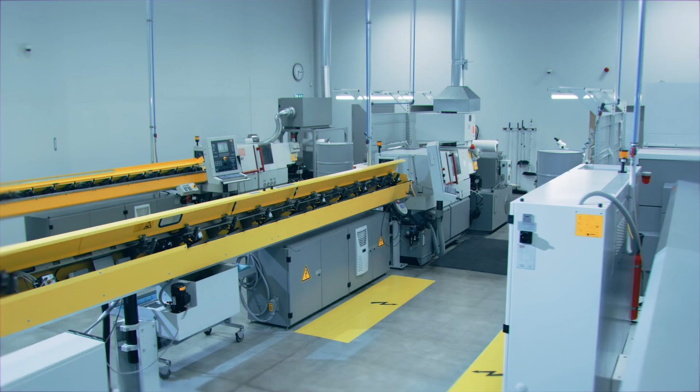Production facilities in all sectors are changing rapidly, and they have to do so in order to keep up with their competitors. Digitization plays an essential role in this process, but it also increases the complexity of systems. What if a problem occurs and no one's there, especially with the current coronavirus pandemic forcing us to change things faster in this area? Digitalization in service and maintenance is the solution.

And that's no problem at all for the Pepperl+Fuchs family.

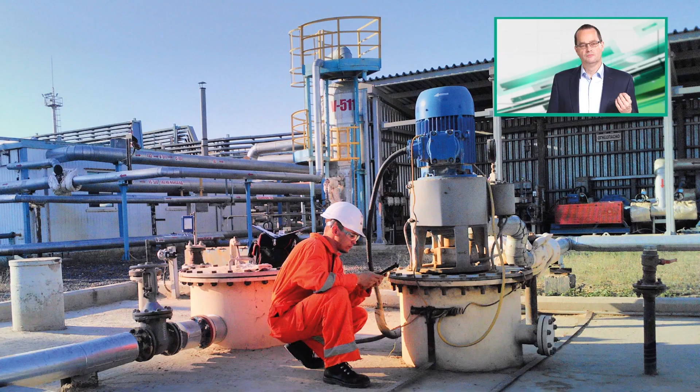The hardware and software world are getting more and more complex, and Pepperl+Fuchs and ecom are dedicated to bringing these two worlds together and providing solutions to support you with your digital transformation process. You need mobile devices, you need intelligent wearables for remote collaboration. You need proper mobile applications which provide the right information at the right time to your local maintenance personnel, the same for services. You need location-based services, you need to enable remote assistance for expert video calls, and you need the right instructions and guidelines on site at the right time, at the right location.

And with this vision, I'm happy to introduce you now to Johan De Geyter. Johan is the CEO of Iristick. Iristick is a leading supplier of smart glasses with a high level of experience, not only in the technology but also in the applications. Johan is now going to introduce us to the world of augmented reality in tomorrow's workplace, in particular in the field of service and maintenance.

Thank you, Jörg, for the introduction, and thank you for the great overview of digital initiatives ecom currently already masters. My name is Johan De Geyter, and I am the CEO of Iristick, and we are the manufacturer of these Iristick smart glasses. We believe that smart glass technology will become a key technology for connected workers in the future. Frontline workers will use smart glasses to provide information to remote experts, or will have access to digital information to execute their daily tasks. Since more than a year, we have the pleasure of working together with ecom. Their Smart-Ex smartphone is a very powerful device that connects to our smart glasses.

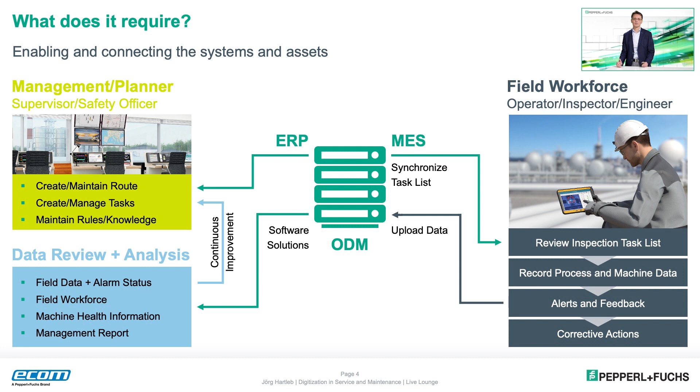And of course, it's about the devices. I touched this already a little bit, and for us at Ecom, mobile devices means our tablet computers, our smartphones, our smartwatches, and of course also auto ID systems, which help you identify the assets in the field.

But we just don't leave you alone with the devices. We help you roll out your software onto these devices, manage those devices, and take care of the security patches on the devices. We know that security and IT security is one of your major concerns.

What else does it require? We were already talking about the mobile device. But the mobile device is just a dumb piece of electronics without software. The software has to be tailored for these jobs. We have to make sure the information presented to the mobile worker is structured, lean, and that we provide him just the information he needs right in the moment when he has to perform the job.

On top of this, the systems he has to deal with become more and more complex. If I look at myself and compare myself with my team, I have the least knowledge of everybody, but I know whom to ask. This is about remote assistance. We will talk about this a little bit later.

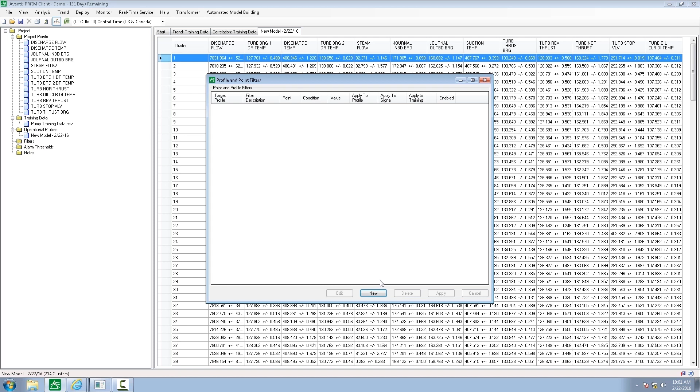Just have a look at such a system. We are combining lots of data from the ERP systems, from the manufacturing execution systems, and from quality systems. We combine all this data and look at specific assets, looking at how these assets behaved in the past.

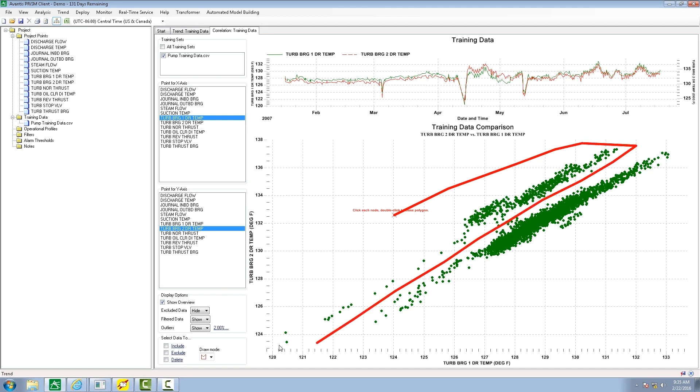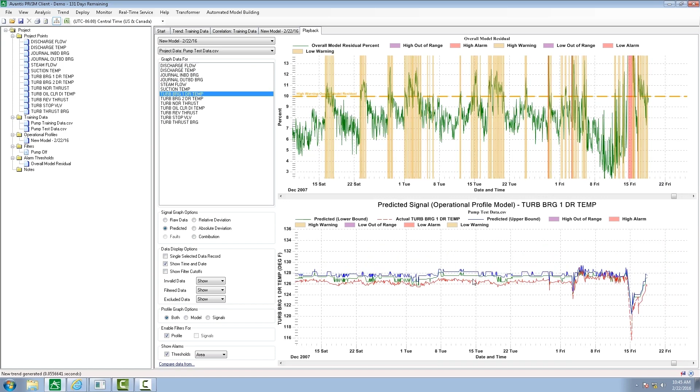We are looking at patterns, at failure patterns. What was the runtime? What was the load of the machine? What does this tell us in terms of when this asset is going to fail? This is what it is about.

But just looking in the past is not everything. We should combine this with real-time data from the asset itself, with sensors and everything, and of course with data the maintenance teams are gathering while they are doing their job.

And the outcome, best case for the user, is not just a pattern or a huge Excel file. The outcome, best case, is a checklist telling him this and this asset has to be maintained because we are probably not too far away from a possible breakdown. He gets the checklist, he gets the procedures - what has to be done, in what sequence the maintenance has to be done. He will have access to the operating manuals, access to the machine data, to the drawings.

And of course, on the fly, all the checklists are being generated and the job is documented. And again, if we think back to what we were just discussing, this data helps to make the predictions more precise.

So what is then the solution? I'm talking about the perspective of the mobile worker. We were just talking about the back-end systems, but that's not what our teams out there are dealing with. They have to be presented with meaningful information, stripped down to what is needed.

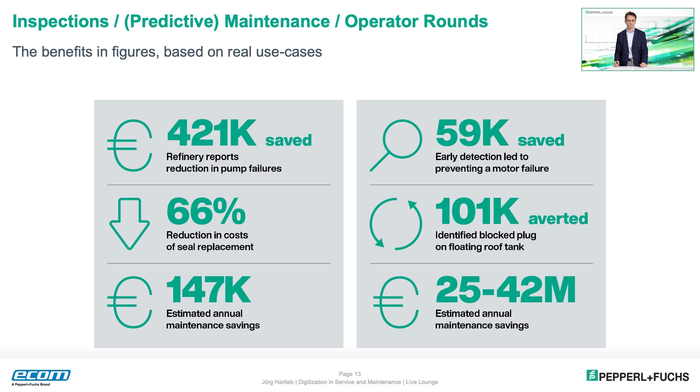When we are talking about predictive maintenance, we also have to talk about remote assistance, because using data for planning the maintenance is just one thing. On the other hand, we have to help the teams out there with their job. The systems become more and more complex. Not everybody is able to know everything. Same with me, if I look at my team

it consists of highly specialized people, and I don't claim for myself that I know everything. I know probably the least, but I know whom to ask. And this is exactly what these systems do. You can call in an expert. You don't have to wait for him. You just give him a ring, open a video stream, and have him look at what you see. He can help you assist with your job. And as we go along, we will see that we want to take this even one step further. But let's see.

Closing the skills gap. I don't think that the teams out there really have a skill gap. But imagine something broke down. You have a certain idea of what has happened.

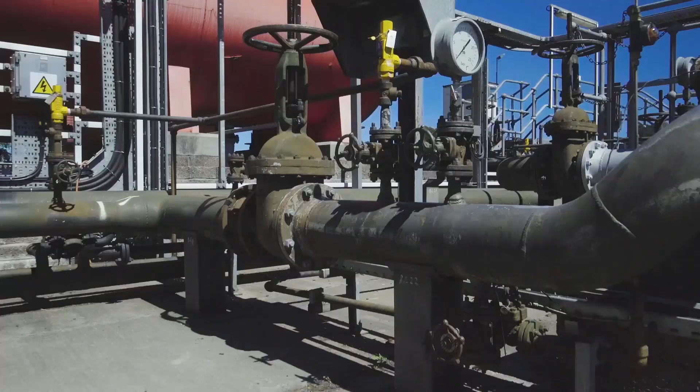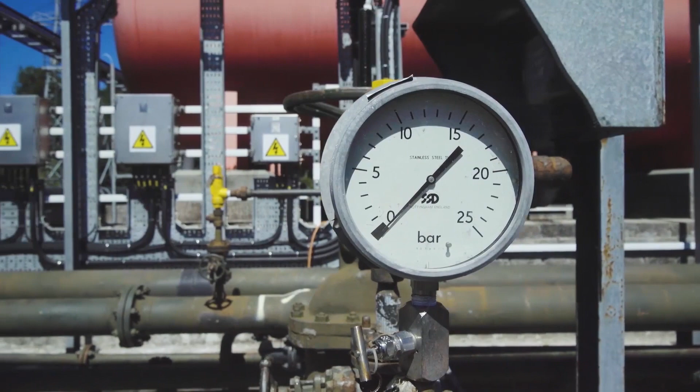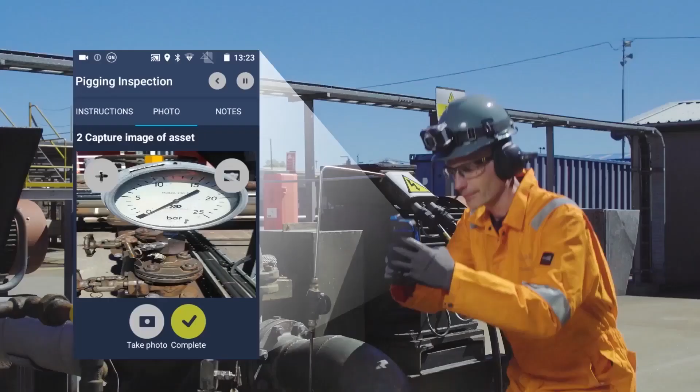Digital transformation is changing the industrial landscape. Enterprises require connected solutions for rapid response, cost reduction, improved preventative maintenance, and increased uptime. In this scenario, a rig worker, Kyle, is about to complete his first inspection on a recently installed pipe fitting and gauge. With his zone-rated device, Kyle initiates his work instructions by scanning the asset barcode. Once Kyle completes the first part of the inspection, he is then instructed to connect the Onsight Cube to his phone and calls Taylor, the off-site senior engineer, to continue the pipe gauge inspection.

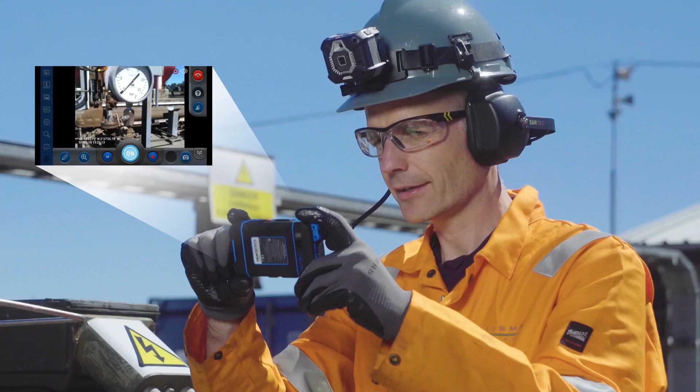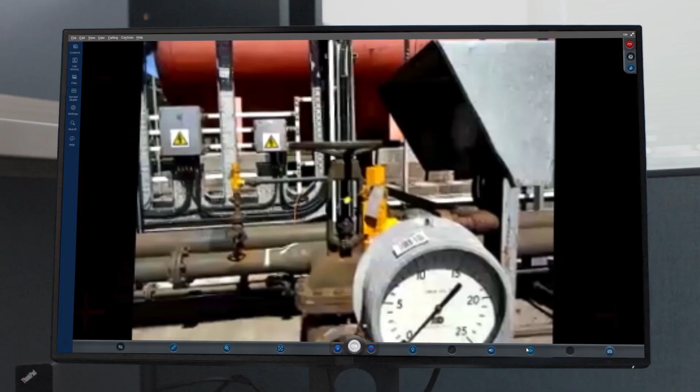Hi Taylor, it's Kyle from the Aberdeen rig. I'm just checking this new pipe gauge, and I'm wondering if the reading I'm seeing is correct. Hi Kyle, the numbers are reading correctly. I am switching to thermal view to confirm the gauge with the temperature reading. I'm also recording this session to add to our knowledge base. Taylor changes the view from the cube to thermal and adds the temperature spot and captures images. I'm going to bring in our supplier to confirm what I'm seeing.

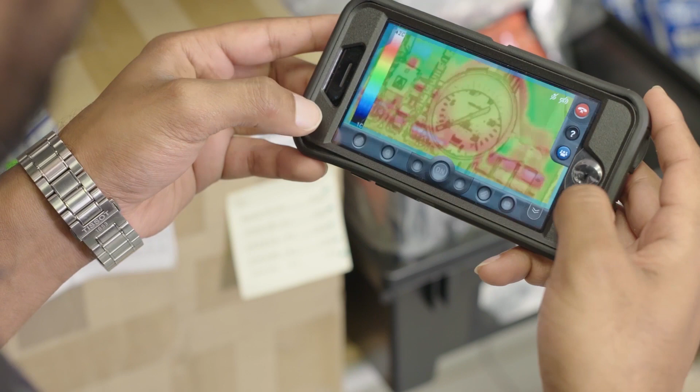Hi Taylor, how can I help you today? Hi Zach, this is our first time looking at our gauge since installation. Here is the thermal view, and here is the gauge. Is what we're seeing what you expect? Yes, this looks right. I'm going to mark off the initial check as complete. Thank you, Taylor. Thanks, Zach.

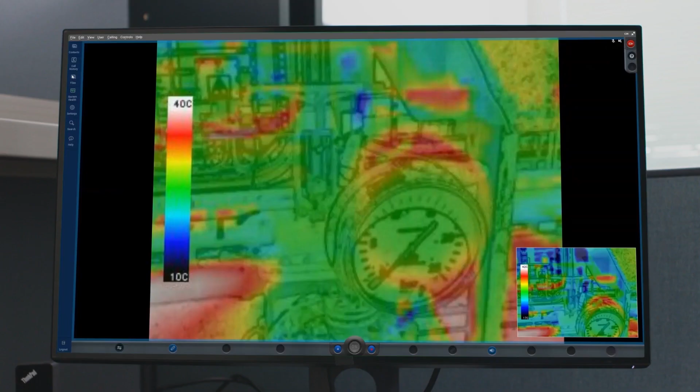Taylor and Kyle are able to complete the inspection. Once the call ends, the recording and pictures are automatically uploaded to Onsight Workspace for future reference. Okay, thanks Taylor. We'll speak to you later. Thanks, bye.

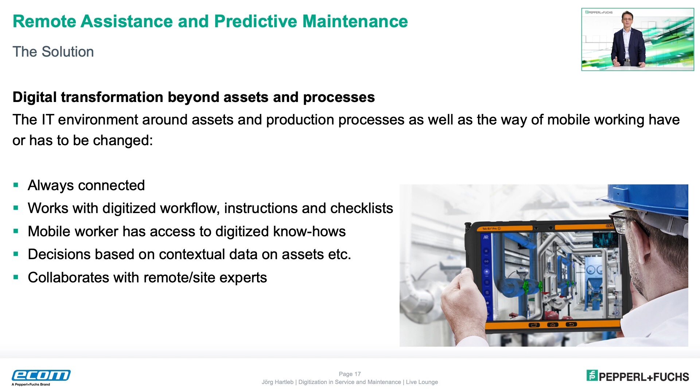So what we have seen in the tiny video is that we are extending the so-called digital transformation, the world of data, beyond those processes. We are now getting the human being connected to those systems. We are helping them to do the job and to make use of these systems. It's about the workflows, it's about decision-based contextual data. And we are using this technology also for ourselves and to help you with the job out there.

Let's have a look at our latest HMI terminals, the VisuNet GXP, a modular system, a pretty cool system where you can do the maintenance without just removing the device from the field. And by using these kind of digital procedure systems to help you maintain these systems in the field, no matter if it's about repairing it or even upgrading the system. Let's have a look.

Pepperl+Fuchs has upgraded their whole VisuNet GXP HMIs. They are now equipped with the latest Intel CPU generation, with the newest Apollo Lake processor, which makes it one of the fastest Zone 1/21 HMI devices. Besides expanded storage, the new computing units are based on the latest Microsoft OS with long-term support. The modular design also enables a quick exchange of a defective unit, so you do not have to send back the whole device for maintenance. Instead, you can replace single components by yourself.

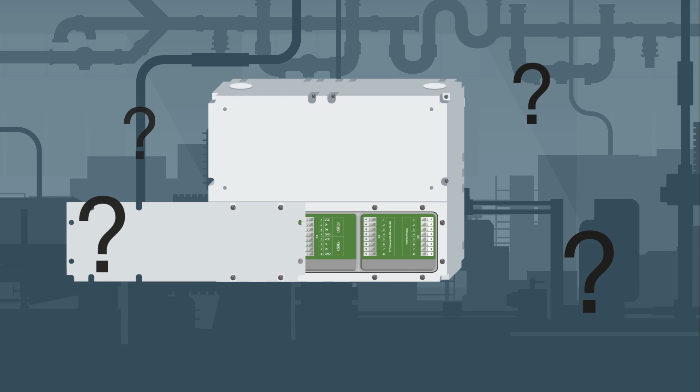You want to update the TCU now? Simply loosen the screws and open the housing. After opening the TCU, all connections and cables can be disconnected, and it can be carefully removed from the DPU and replaced in the same way. Excellent, but how is the pin assignment now? That's quite simple. Via ecom Pad-Ex, just have a look at the online manual, or contact the Pepperl+Fuchs expert via remote support.

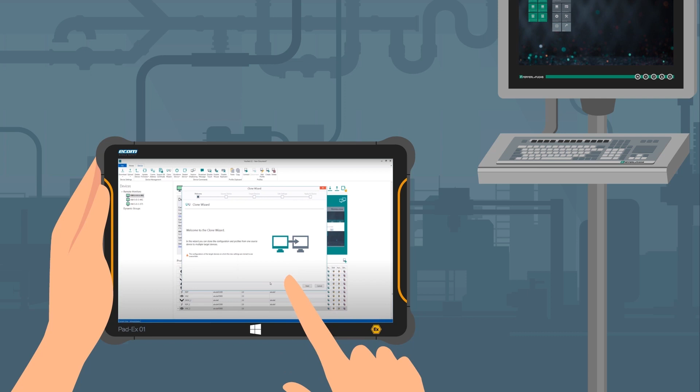Hardware exchange? Check. Now, open VisuNet CC on the tablet and upload your project saved in VisuNet CC again on your device. All configurations and license numbers are again synchronized with your new TCU. Yes, it really is that easy. You want to integrate a new HMI device? For example, our new VisuNet FLX? Just use our intuitive clone wizard. Yes, it's again really simple.

This small example of a device system maintenance supported by a digital system clearly shows the benefits, I think. It's about having access to the repair information, to the maintenance information. You have it right at hand. You are being guided through the process, and you can do the job successfully.

But as you have seen in the video, we were using a tablet computer. But what if you need both hands to do the job? This is about smart glasses.

Let's talk about this a little bit. In the beginning, I mentioned that we at ecom want to take this even one step further. And this is exactly where we have to talk about smart glasses.

Smart glasses are the perfect tool for remote assistance. You can call in a remote expert looking over your shoulder, and he is definitely seeing what you see. It's not only about an expert helping an expert, it's also about training young, inexperienced people, giving them the certainty that the job they're doing is done in the right way and that they feel they're doing it correctly.

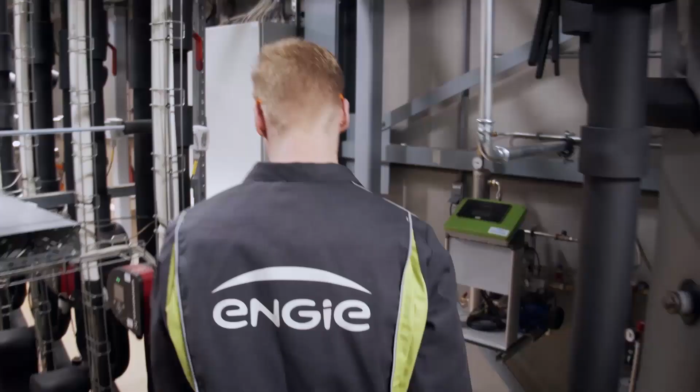Our client, ENGIE Services South, is market leader in technical services and energy projects in the Netherlands. Every day, their service technicians in the field have to solve technical problems on site in the fastest and best way. ENGIE's clients are large enterprises, and every minute an operation is down costs money. ENGIE was looking for a solution to solve two conflicting challenges: shorten the training time of young, inexperienced technicians and transfer the unwritten knowledge of senior technicians to the younger generation.

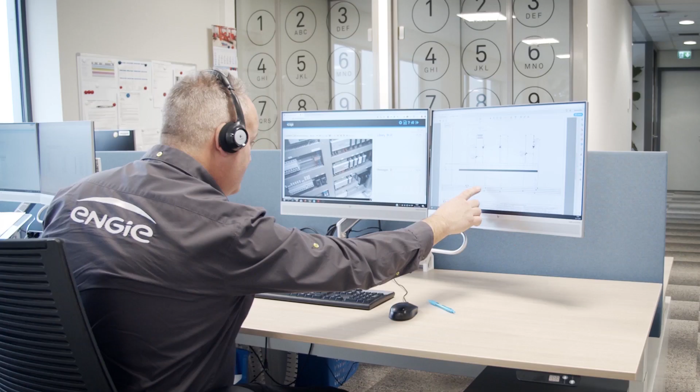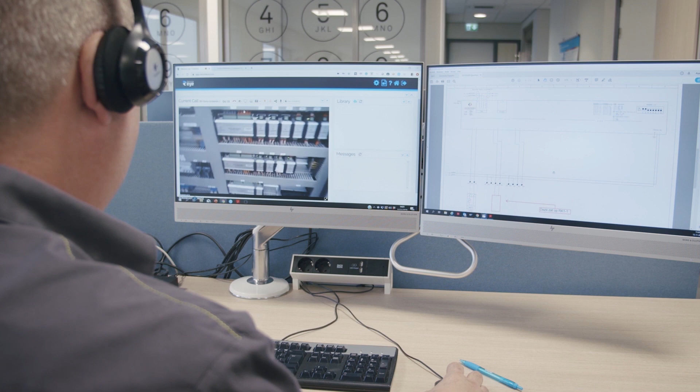ENGIE South equipped 4 young technicians with a pair of Iristick smart glasses. When confronted with a problem they cannot solve alone, they set up a remote assistance session with the senior expert of the team. He can see what they see, assess the situation, zoom in on details, and indicate problem zones or action points. They have real-time two-way communication, feedback, and instructions. It's as if the expert is looking over the shoulder of the junior technician. Moreover, by fixing the problem himself, the junior expert learns in a deeper way and will remember how to solve the problem next time.

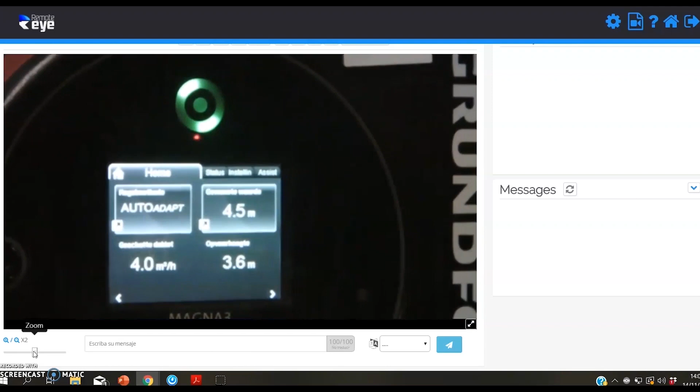It sometimes occurs that the expert is on the road when one of the technicians calls for help and asks to make contact through the smart glasses. He then safely parks his car, creates a hotspot on his phone, and advises the young technician. The advantages are very clear for all the stakeholders concerned.

The senior expert gains about 4 hours a week in travel time, since he can solve problems from his desk or from wherever he is at that time. The technicians can solve complex problems faster and in the correct way. They feel more secure and less stressed because they know they can always ask for immediate help from the senior expert as a backup plan. Customers get a better and faster service on site, and young technicians are able to operate in the field much faster.

With these smart glasses, on one hand we have the aspect of seeing what you see and helping you in real time. And of course we can provide content-related information—showing drawings, showing procedures, showing how he has to work through the job. And of course, he has both hands free.

But smart glasses do have their disadvantages as well. It's about using the right protection glasses—for different jobs you might need a different protection glass, but what do you do if you don't have the right one at hand? And then there's the dioptric issue. I use glasses myself, and I would need the right ones—they'd have to be personalized. So there are disadvantages to it.